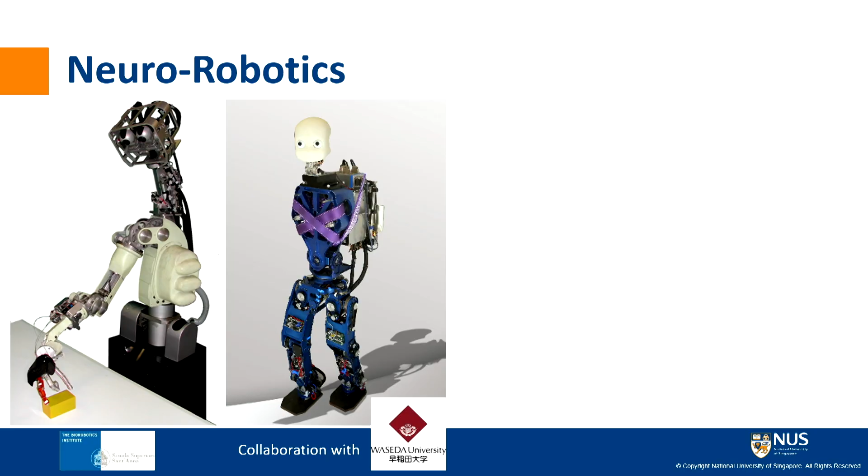And you see, I was focused on sensory motor coordination for manipulation. Then we built a platform, a biped humanoid, in collaboration with Waseda University. So I moved a little bit on locomotion, but still focused on the way the robot could learn and the way we could implement brain models on those robots.

So they were basically platforms for research. They were not aimed at any application. But despite that, I even managed to found a company, which was not really in my plan with this kind of fundamental research, but it happened at some point.

And as you see, this implementation of brain models is very much what we call the bio-inspired approach to robotics. But it's not only that, it's actually a sort of double relation between biology and robotics. Of course, the first meaning is easier for us, we are more familiar with that. So from the biological system, we observe, we derive some models, and then we build our robots. This is what we call bioinspiration, biomimetics.

There is a journal, it was mentioned, I'm editor-in-chief. It's not only for robotics, of course, it applies to many other disciplines, from materials, to many other fields of engineering. But when you do that, if you have experience in your own research, you also gain more insight on the original model. So it's a double kind of relation.

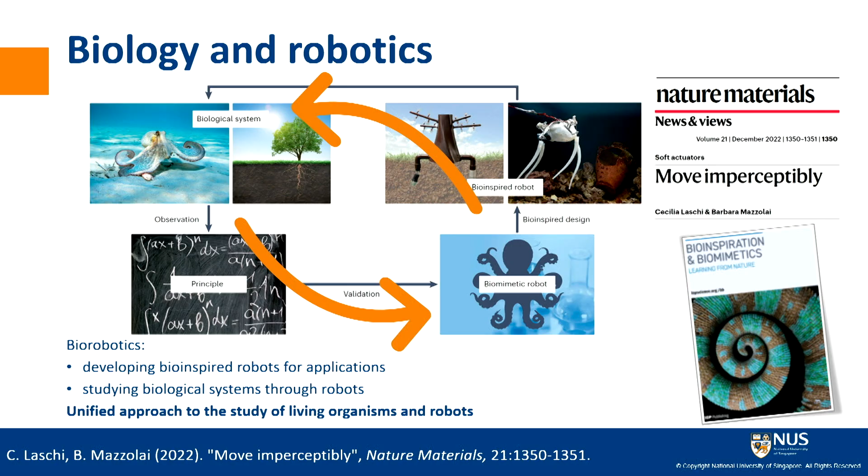Sometimes we refer to this as biorobotics when it is about robotics, but I like this definition from the first cyberneticists, actually, in the early 20th century. So it's a sort of unified approach to the study of the biological system and the machines, in our case, the robots.

And there is a very nice editorial in Science Robotics explaining this in one of the first issues of the journal, explaining the difference between the science of biorobotics, when we discover new principles and explain them, and the engineering of biorobotics, when we invent new technologies, new robots.

So going on to the first arrow, which is the most familiar to us. Okay, this is my personal view of the way we should proceed, which starts from the observation of the biological system. This is where we should get insight on the principle, how it works, the working principle. As roboticists, we can build something, but I don't call them robots. I call them sort of mock-ups, something that helps us verify the principle that we observe. And it's very much trial and error.

It's only if and when we can describe the principles in mathematical terms and abstract them that it can become engineering and robotics. So this step is very important. We have to build some models, and of course we also build prototypes here—again, prototypes, not the final robot, something that helps us verify the model at this point.

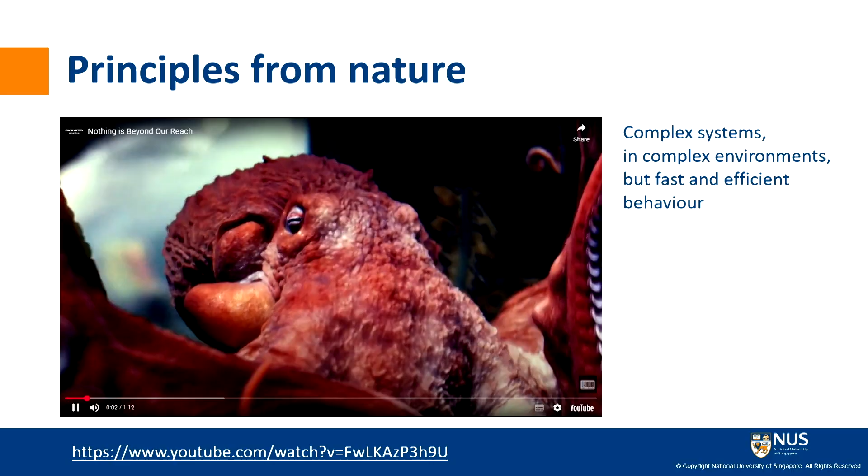So what are the principles that we can take from nature? Of course there are many, but I'm trying to distill a main message here. Let me see if I can. What we observe when we observe biological systems are systems that are very complex. We think our robots are complex, but any single biological system is way more complex than our robots.

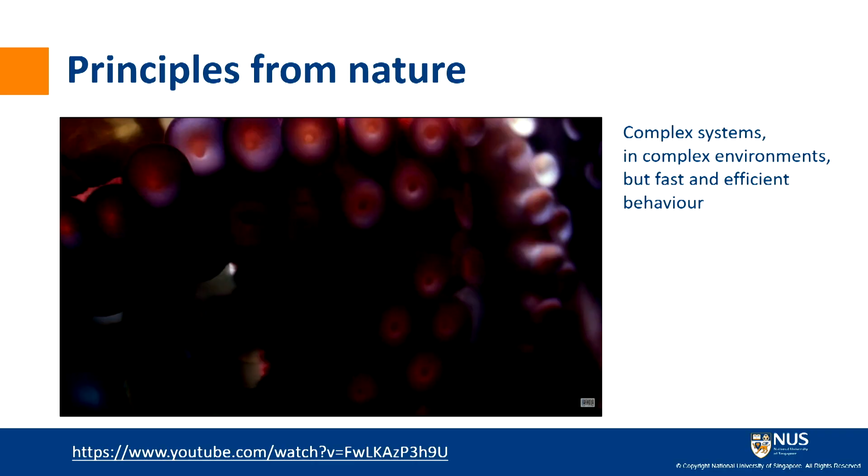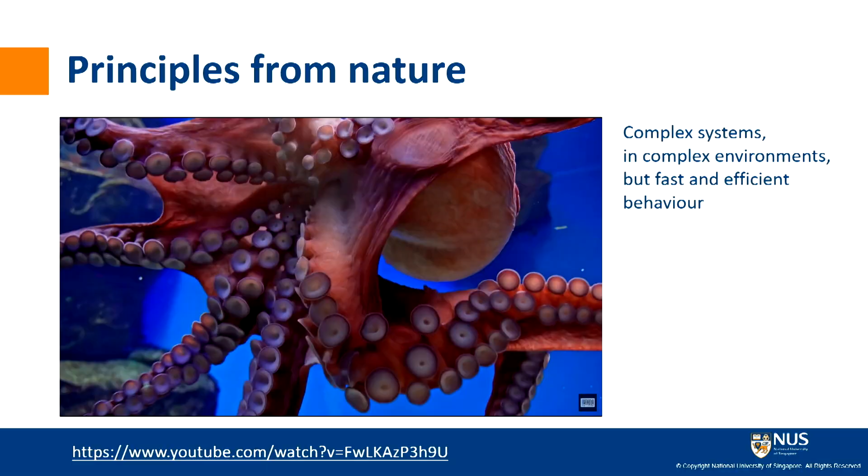In terms of sensors and actuators, receptors and muscles to control, they also live and survive and thrive in natural environments which are very complex, much more complex than the environments where we put our robots at work. But their behavior is very efficient, smooth, fast. So this is what I think we should learn from nature.

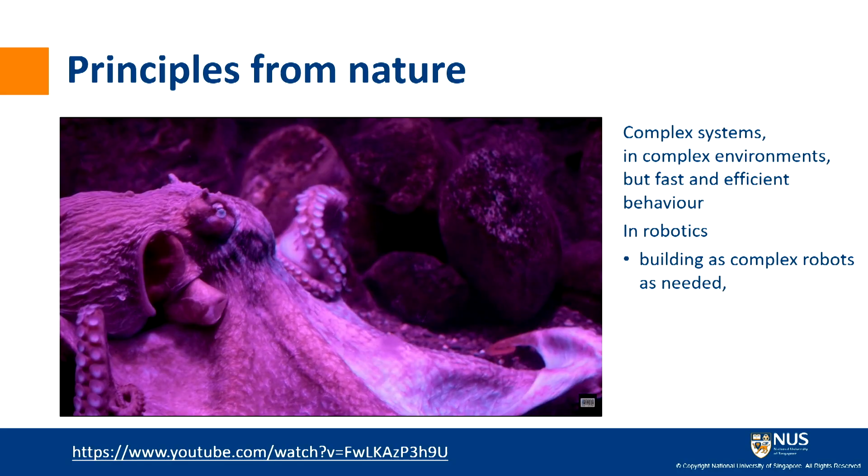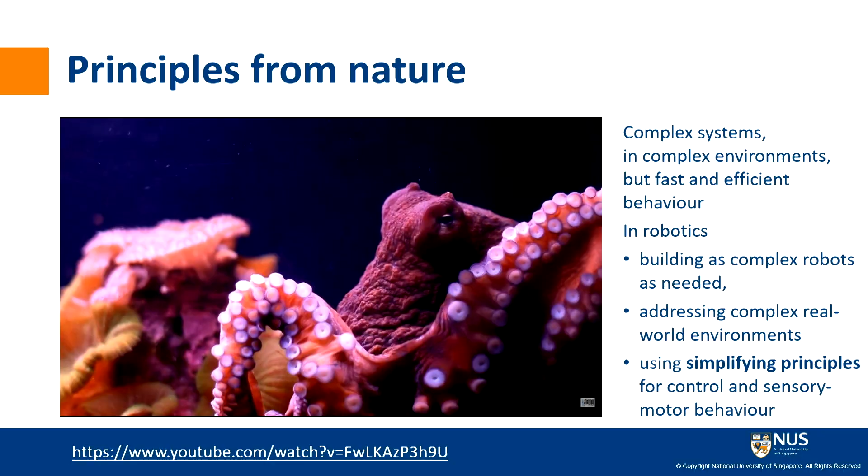In robotics, we should learn how to build robots as complex as needed. Maybe they are too simple for real environments. We should be able to let them work in real complex environments, and we should understand the simplifying principles that nature has put in place to make it possible. So complex systems, complex environments, but simple kind of behavior—the way they work is, at the end, somehow simple and fast and efficient.

In my previous life, when I was studying neuroscience, working with neuroscientists, I learned this word 'simplexity,' which is different from simplification. Simplification is what we do traditionally in robotics—we simplify the environment and put robots in structured environments, and we also simplify the system because we have a limited number of actuators and sensors. Simplexity is different: we don't want to simplify the system or the environment, but use simplifying principles to make it work in a fast and efficient way.

There are many such principles in our nervous system, in our brain, and not only in human brains. I won't go through all of them now, but I'll pick one that I find particularly interesting: the capability of brains for predictions and anticipation. We are used to sensory feedback for action in our robots, but actually this isn't always the case in brains—a lot is based on prediction, anticipation. It's a sort of open loop.

If we want to close the loop with sensory information, sometimes it's too slow to really explain sensory-motor coordination. So in robotics, we generally have sensors on one side, actuators on the other. Sensors receive something from the environment, it is processed by some form of brain controller, and an action is generated.

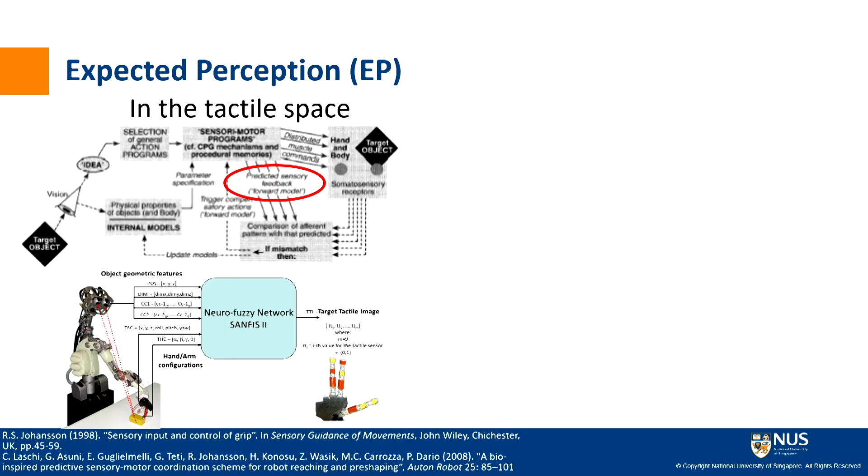We implemented this long ago in the tactile space. This is a model from Roland Johansson, a neuroscientist who explained what we do when we see an object and try to grasp it. You see that at the same time, when we generate the motor action, we generate the tactile image. This is what we implemented in the old humanoid platform that I showed.

When I did this research, almost 20 years ago, it was not very successful, because in the end you don't see a real advantage—you just save some computing time, but if you have enough computing power, you don't care too much. This is what actually happened in robotics, especially with vision. 20 years ago it was cumbersome to process an image, but today it is not.

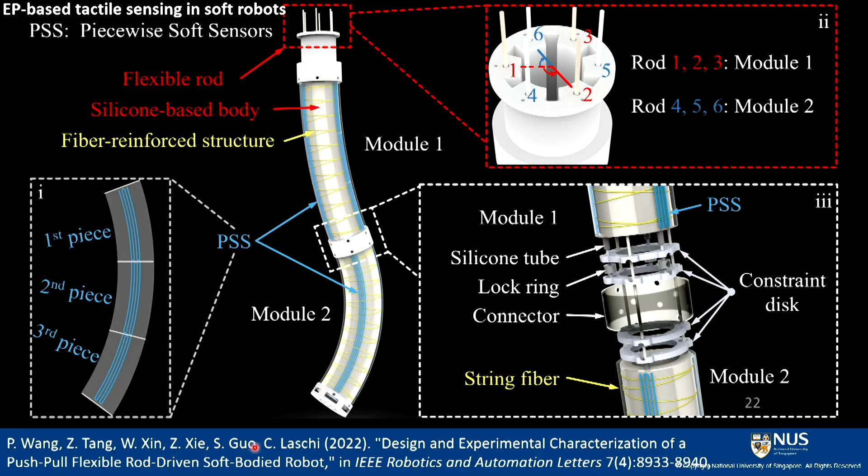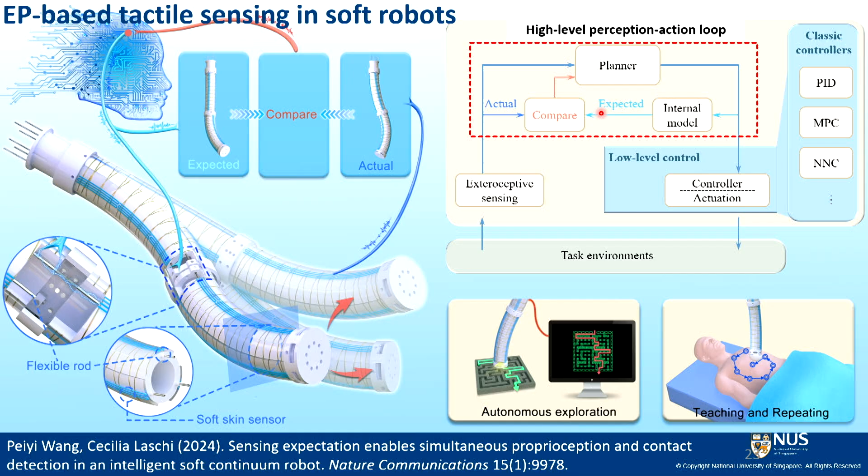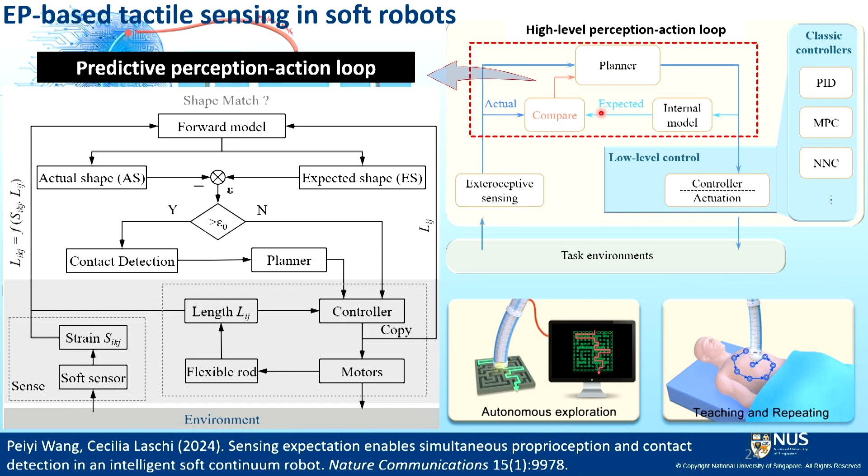This is a fundamental problem in soft robotics: how can you distinguish when the arm is deformed because I'm moving it, or because it's deformed by an external force? I consider it a fundamental problem, and the way I solved it is by using prediction. I can predict with some internal models the response, the output from the sensors, and understand if it's what I was expecting because I'm actuating and moving the arm, or if it's an external force deforming it. We gave a couple of demonstrations of it.

So we are now using here the external tactile perception to explore and then solve this maze problem.

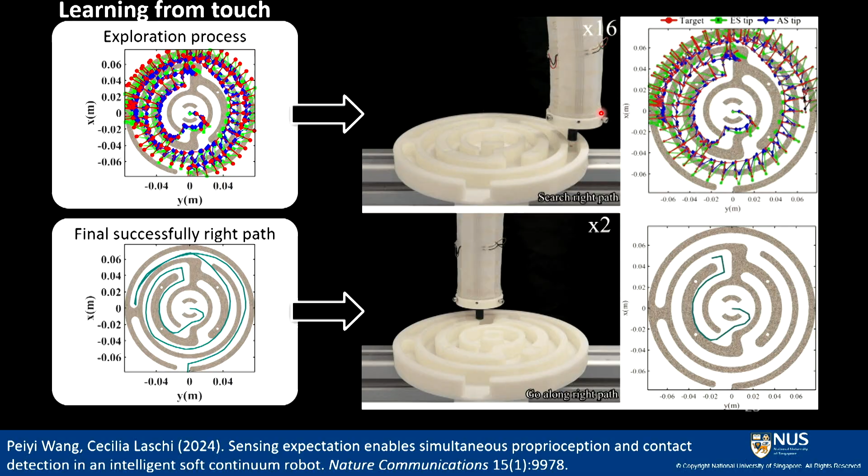Going back to my experience in neurorobotics, I was implementing these brain models, and I was pretty happy with that. But I was not happy with the body, because at some point I had to translate what was coming out from those models to talk to a body that was completely different. Those humanoids are built in a pretty traditional robotics way. There were also the years when embodied intelligence was becoming popular, saying that intelligence is not only in the brain, but the body plays a very important role. So the brain is not all.

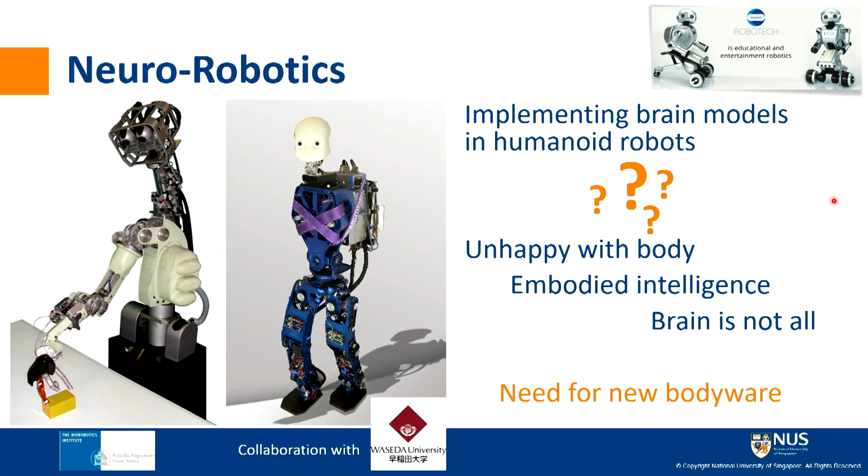So I had a lot of doubts, and I decided there was a need for a new body, where these bio-inspired brains should be more in agreement with the body. I'm sure you're familiar with embodied intelligence. It says that the body itself plays a role in intelligent behavior. Intelligent behavior means sensory-motor coordination, adaptation, and if we consider the role of the body, we can simplify the tasks of our robots very much. This resonates very much for me with the idea of complexity, the idea of simplifying principles.

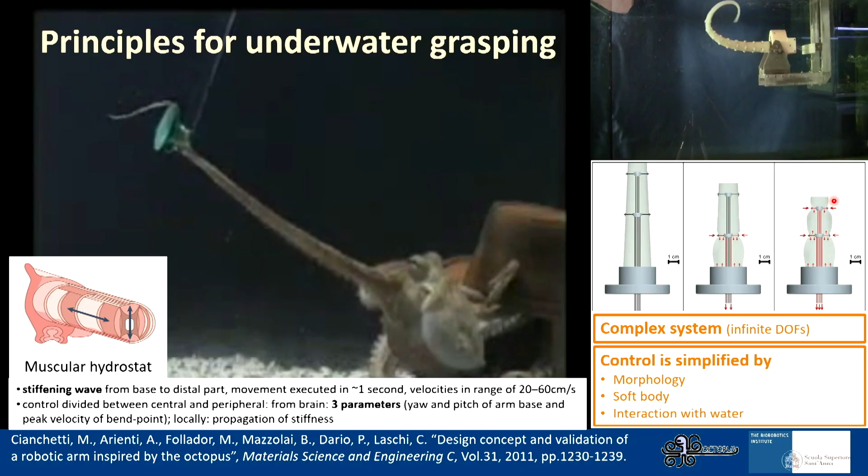This movement is based on a stiffening wave from the proximal part to the distal part. As you can imagine, there are many muscles involved. It's like controlling an infinite number of degrees of freedom, so in robotics terms it's pretty difficult. It seems the animal only uses 3 parameters from the brain to set the height, the angle of the shoulder, let's say. Then there are many neurons in the arm controlling this movement. It's a sequential activation, so it's also a simplification.

But there is also a big part which is done by the mechanical structure: the fact that buoyancy is zero, the fact that this bending is, as you see, also a way to reduce the water drag, and on the contrary, to be helped by the water drag.

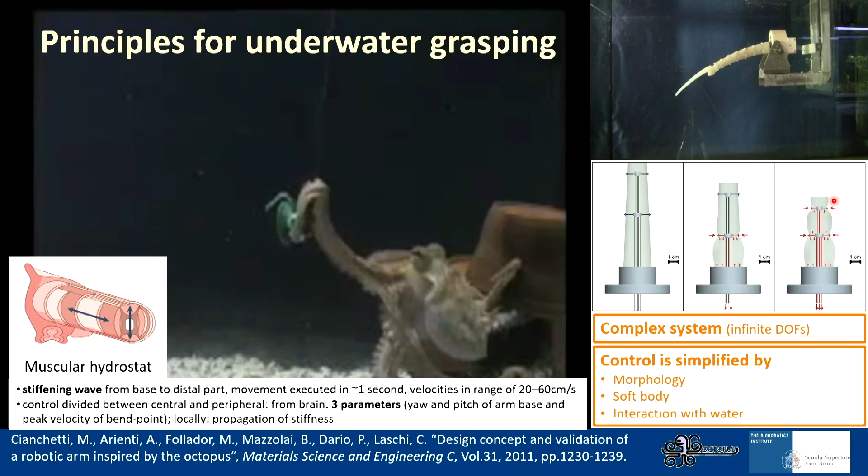We also found a lot of very interesting principles in the way this muscular structure works. It's called the muscular hydrostat, because the volume is constant during contraction. So we can have elongation and shortening when the longitudinal muscles are contracted or the transverse muscles are contracted. We have bending, of course, in any direction because of the longitudinal muscles.

We have muscles for torsions, but what is very, very interesting for robotics is that co-contractions increase the stiffness. So the octopus is a soft animal, but it's not always soft — the octopus arm can stiffen a lot. And this is exactly what we are looking for in robotics, in soft robotics.

We need to observe the principle, but also describe it mathematically. So how far are we from describing mathematically this principle of embodied intelligence that we observe in the octopus? For me, embodied intelligence is this additional arrow in any architecture you consider for your robot.

So it's this mechanical feedback from the environment. Are we ready to do this transition? And is it enough to model this arrow to model embodied intelligence?

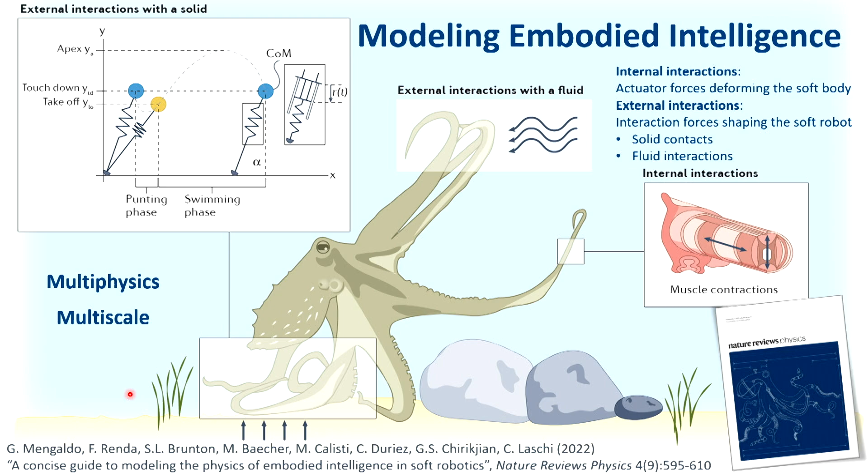We proposed a very general equation where you have a term describing the soft body and two terms: one accounting for the internal interaction, the effect of actuators, and the second accounting for external interaction forces. There are techniques for both terms—some in the realm of continuum mechanics, some based on lumped parameters or reduced order models. We just have to learn how to put them together.

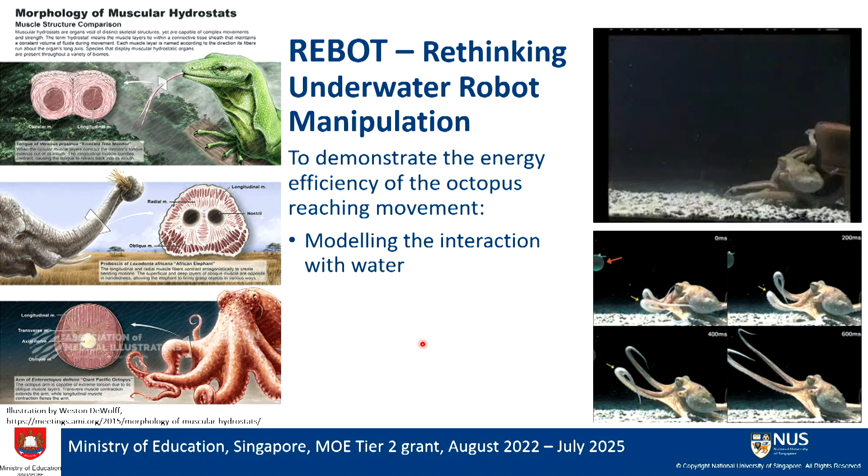I have a project exactly on this reaching movement of the octopus arm, where I want to demonstrate that it is energetically efficient because of the shape of the movement and because the water drag is used to help the movement.

I want to demonstrate this by considering not just the deformation of the octopus arm, but coupling that with the fluid dynamics of the movement in water. We also have another project, a collaboration with Italy, where we want to compare different kinds of muscular hydrostats and model their behavior.

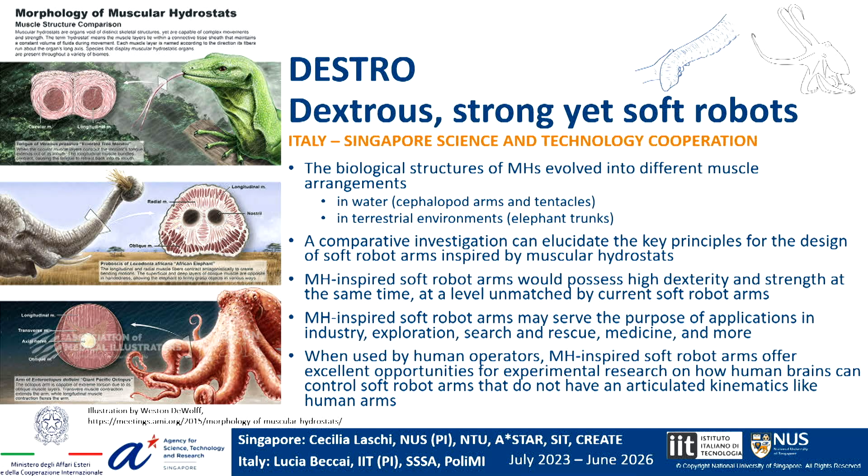In this collaboration—this is unpublished, but it's a very interesting result—with Politecnico di Milano, they developed a modeling framework for the cardiac muscle. This framework allows simulation of the activation of the muscle via motor neurons, the electrical activation, the contraction, and the fluid dynamics of the blood flow.

In our case, we replaced the cardiac muscle with the octopus muscles, arranged in the same way, longitudinally and transversally. So we can play with the patterns of activation and simulate different activation patterns. This is the best one we found, which produces a reaching movement similar to the animal's.

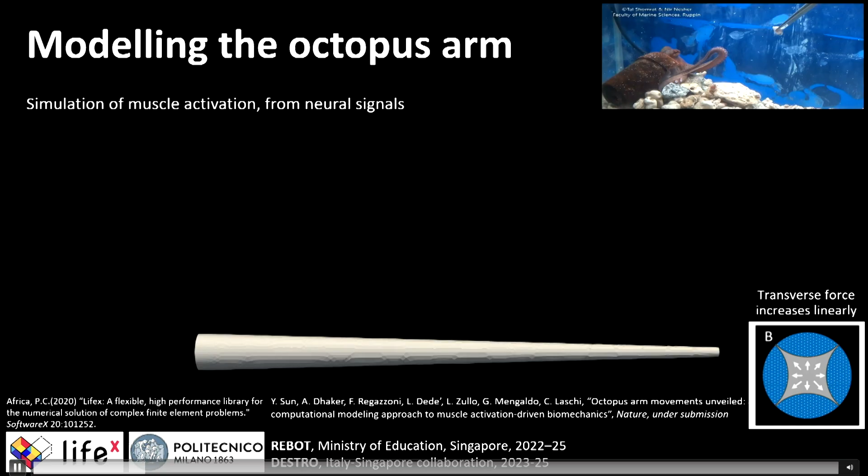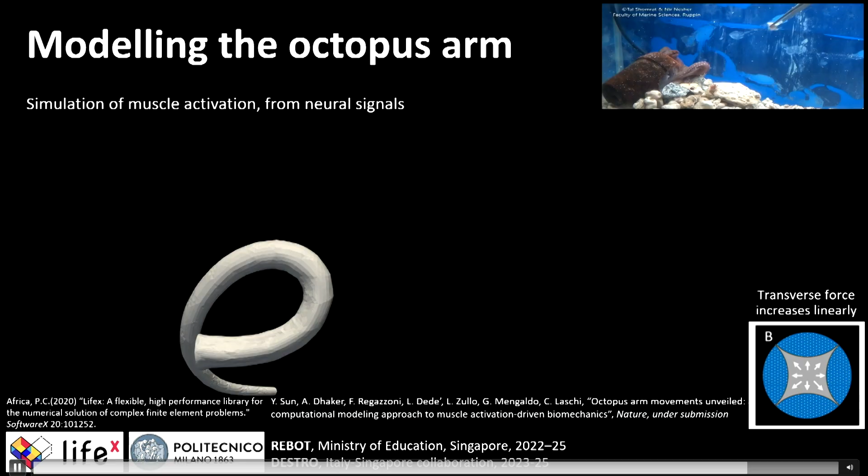We found that to have this similar movement, we need to activate the transverse muscles sequentially, as was hypothesized in biology. We also found a very nice matching with this finding in biology, regarding the invariant velocity profile of the bending point.

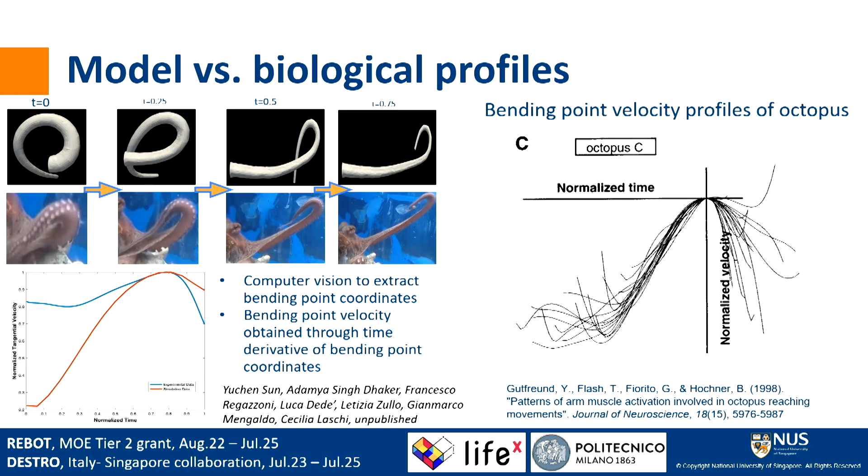We also modeled the internal interaction using the Cosserat rod approach to model not only the longitudinal muscle but the transverse muscles. This method was already used by my former group long ago, but now we could finally add the transverse muscles, demonstrating their important role in obtaining this stiffening wave.

We use a similar approach for the arm I presented before, so we can have a very nice forward model from the rod length. We can actually generate the shape, the final shape, and also the sensor state.

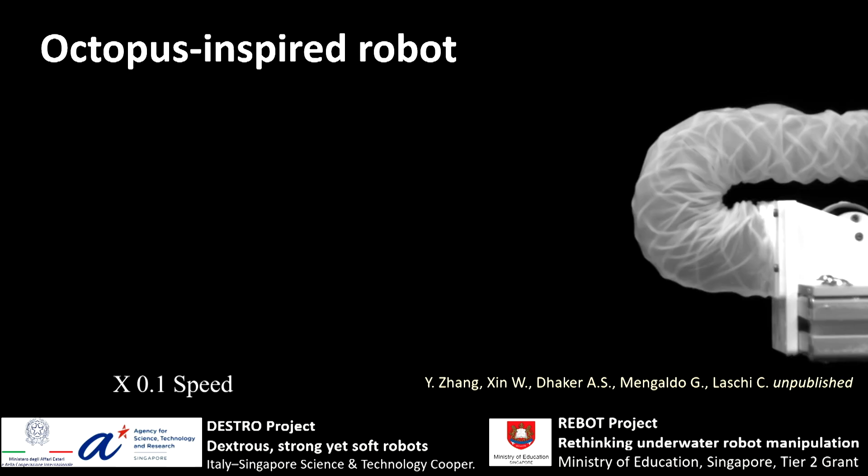Of course, we are building—since this is our ultimate goal—octopus-like arms. I cannot show the internal structure of this one because it is under patenting, but you can see it generates exactly the bending, the bending wave from the proximal part to the distal part.

What you don't see in the video is that the proximal part, from the base to the bending point, is stiffened, while the rest, from the bending point to the tip, is completely passive—exactly what we observed in the animal.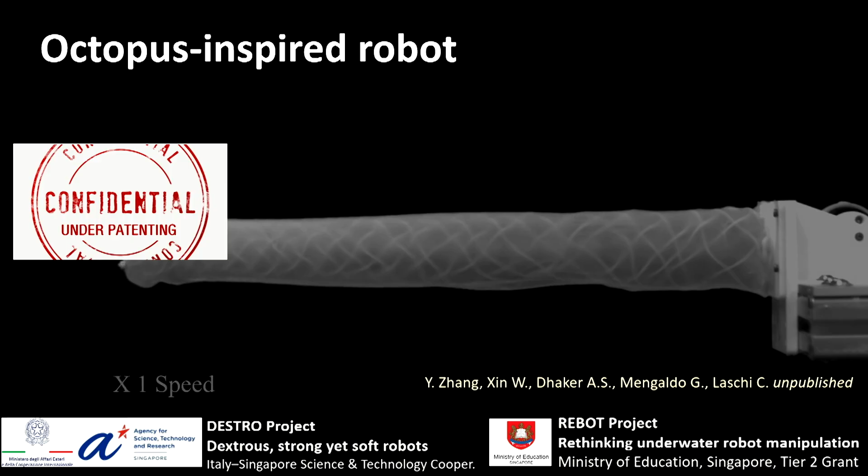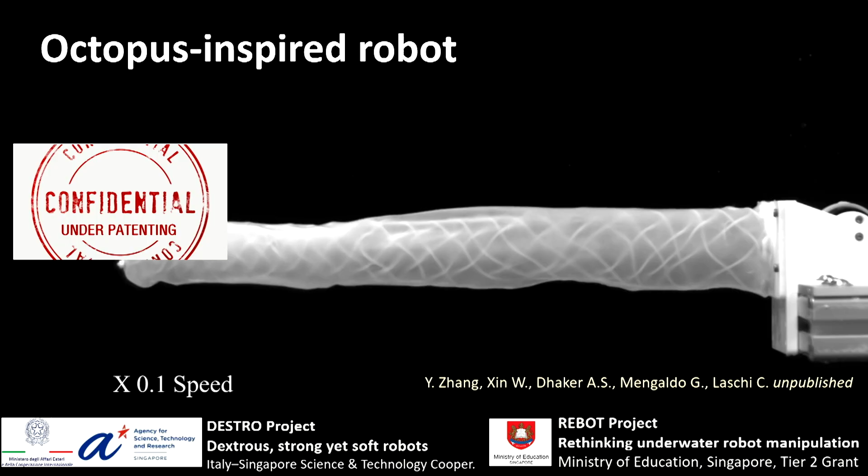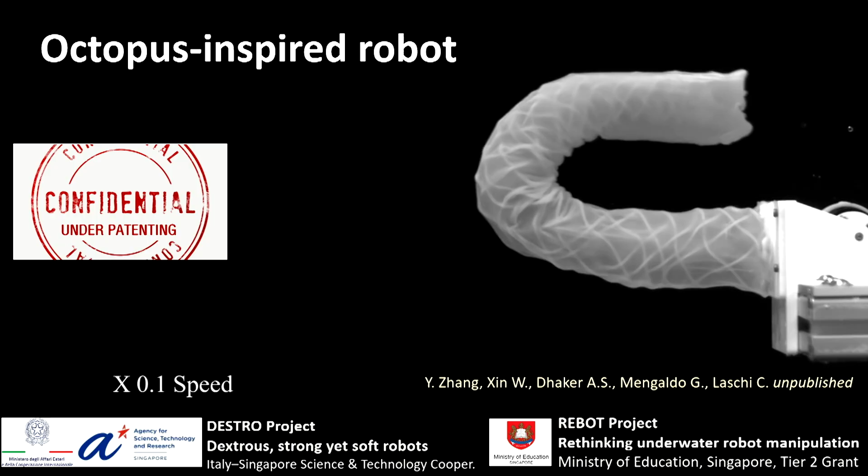Again, I want to demonstrate the energetic efficiency of this movement in water. For the moment, we found it is also very fast and very efficient. We are testing it on some underwater robots, and we are going to test it in the deep sea, 2,000 meters deep. For now, we went in the pressure chamber down to 1,000 meters.

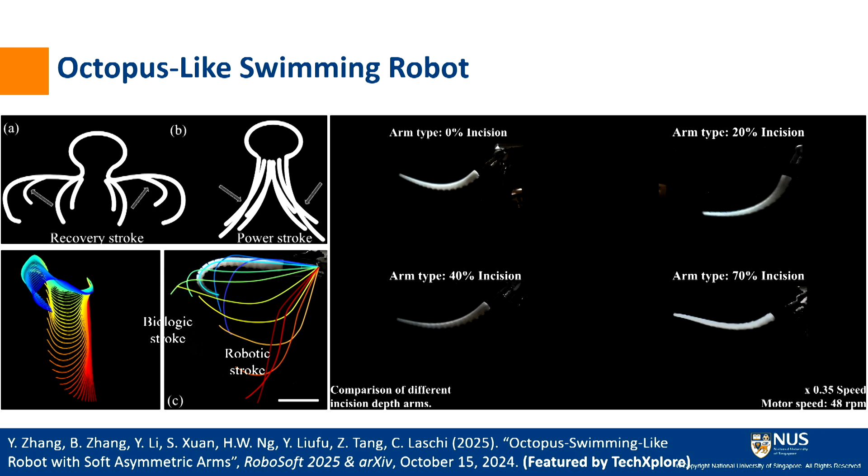Still playing with the stiffness—this is a student project actually—where he tried to implement this swimming-like, octopus-like movement, where we want an anisotropic stiffness because we want the arm to be stiff during the stroke but then very, very soft during the recovery. He tested different ways to build this robot. Let me go a bit faster with the video.

Okay, no need to go faster. This is just the way it swims. Since the arms are moved at the same time, it's basically one actuator.

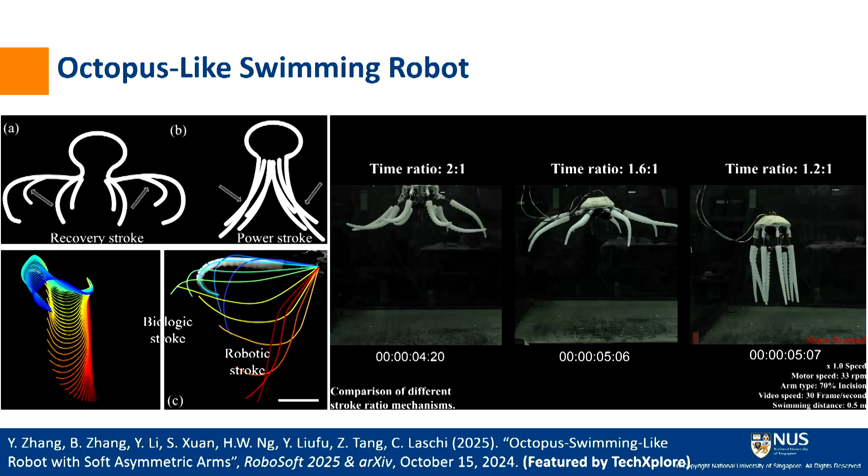Then we have a prototype that can steer, but with just two actuators, with an asymmetric activation of the arms, and that was featured in a technical journal.

We are also testing another hypothesis that we found in biology. It seems that octopus arms, elephant trunks, and many other appendages like tails, and even maybe the human arm - but I will ask Hermano for that - seem to follow a spiraling movement, which is a logarithmic spiraling.

And so we did a little bit of a mathematical model. We played with some of the basic parameters, and we also built a prototype, which is pretty simple.

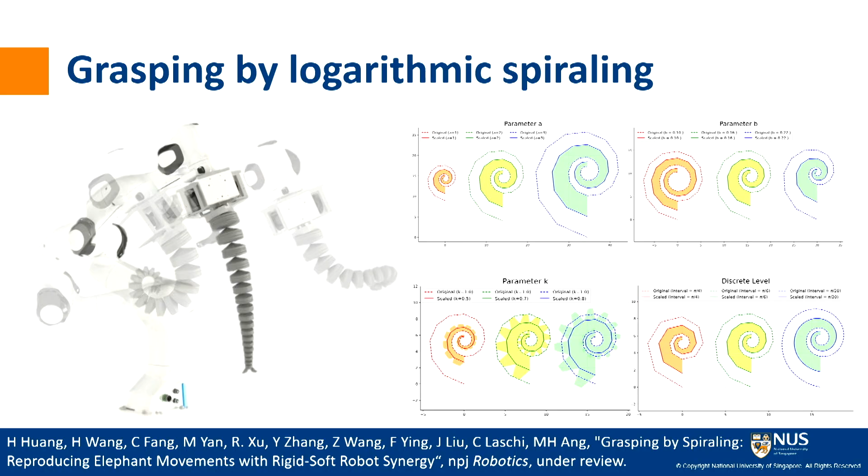I go back to the prototype that you see in this picture. So you see it is actuated by 3 tendons - 3 to have the omnidirectional movement. So only 3 tendons, so we don't have much in terms of actuation. But since the geometry, the morphology, is designed based on this logarithmic spiraling, we have very nice movements.

And we actually demonstrated that we can reproduce some of the motion primitives of the elephant trunk. We have data from biology because there were experiments done on basic movements of the elephant trunk when grasping different kinds of objects, so we used that data to do this comparison.

And even if the robot is completely different in terms of actuation, in terms of working principle, the final shape of the movements is very, very similar because of this logarithmic spiraling.

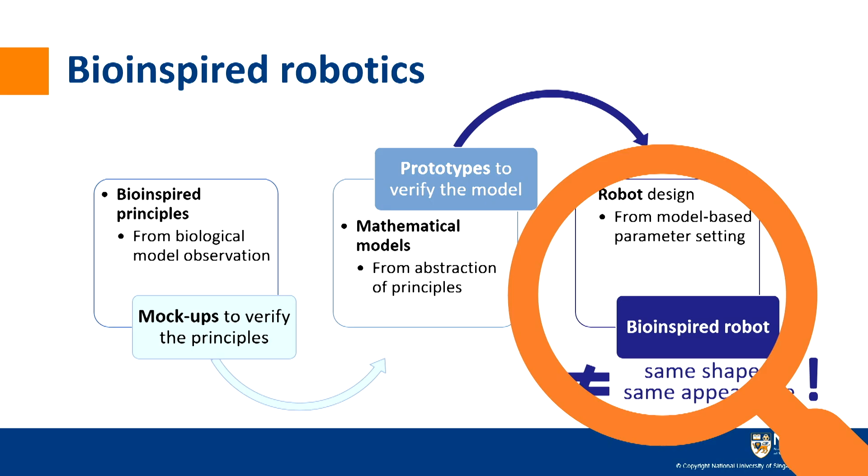So the last step of our, let's say, bio-inspired robotics method is the application, the final robot. So what kind of applications for all those robots? Of course, the first idea is to go back to nature.

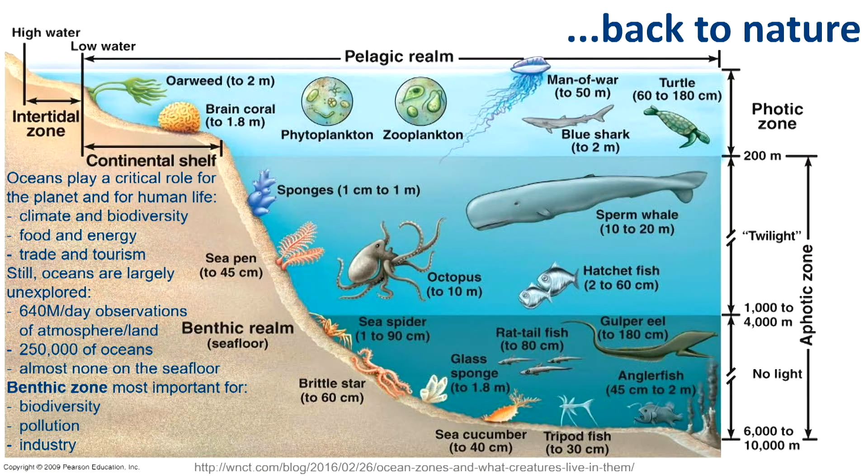Actually, we know that robots are so helpful on the water, but they basically operate in the water column. They don't go on the sea bottom generally. And the sea bottom is very, very interesting because it's where, for example, human activities happen. It's where pollution tends to accumulate. It's home to 98% of marine species.

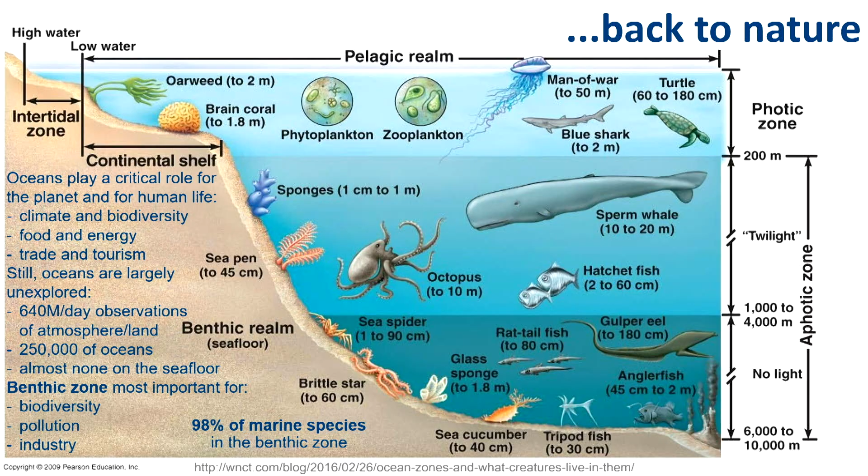And from the octopus, of course, we learned a lot about how to operate on the sea bottom. This is a benthic animal - they live on the sea floor, and they have very nice strategies for locomotion, for walking underwater, for swimming. I'm not going into the details, but there are a lot of simplifying principles in those movements that we can reproduce with robots with very few actuators and very simple control.

So we especially focused on the walking underwater. Walking underwater with legs is not a good idea generally. You probably experience when you walk in the water, you have a lot of water drag on your legs, because they are rigid, because we have a skeleton.

But we found a very smart way of doing that in the octopus, and we describe it with a reduced model here called the U-SLIP. And we found that it describes also the walking of crabs, and especially the running of crabs underwater.

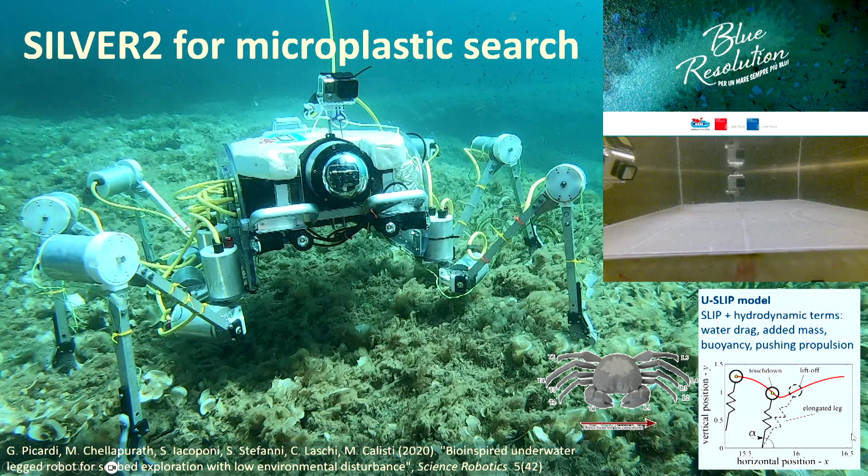So the idea is very simple: we reverse the angle of attack and we push from the back. So the octopus basically pushes from the back, and having completely soft arms, it can shorten and elongate, reducing completely the water drag. The crab does something similar, and based on this model, we could actually design and build this robot that can walk underwater.

The compliance here is in the joints, in the motors, in the joints. The control is basically zero. There is no leg coordination. There is nothing here in terms of control.

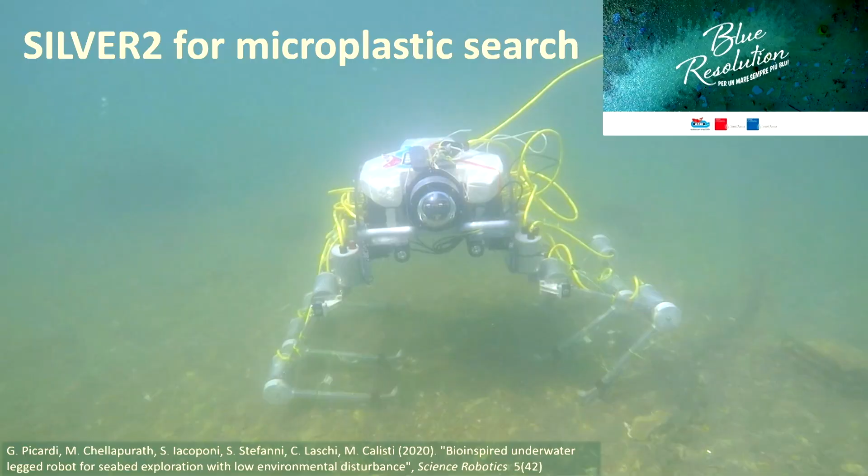But thanks to the mechanics, let's say, this compliance, we also have self-stabilizing gaits. And the robot can keep station without using any energy, without using the motors, and can negotiate obstacles also without any computing - it's just mechanical.

So we can envisage a lot of marine applications for soft robots. They can walk on the sea bottom, but we can use materials that are biodegradable, materials that are self-healing. We can use all the adaptation capabilities of soft robots, and we can really come up with very complex scenarios for marine applications.

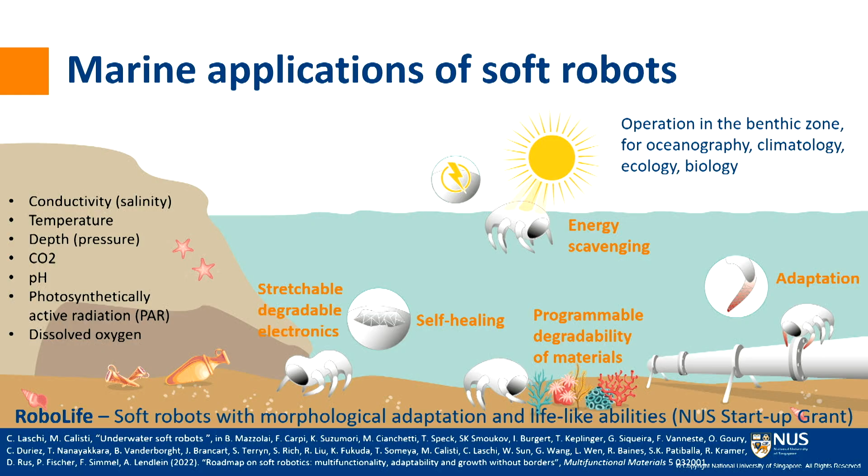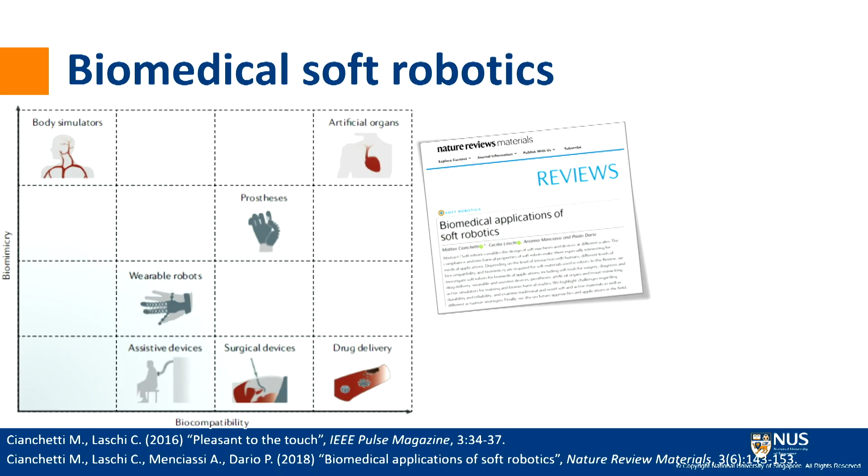In the biomedical field, there are also many applications for soft robots, from artificial organs that can be built with the same technologies that we develop for soft robots, to assistive devices, prostheses, or exoskeletons, soft exoskeletons, or even surgical devices like endoscopes that can navigate safely inside the human body.

Assistive robotics is one of those fields. Of course, if you have to assist the patient with a physical interaction, soft robotics technologies are especially well suited for that, and this is where I'm focusing my research now.

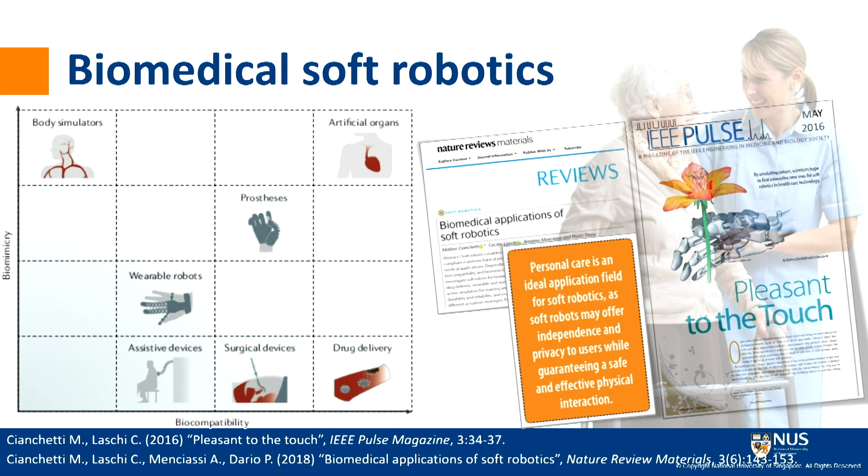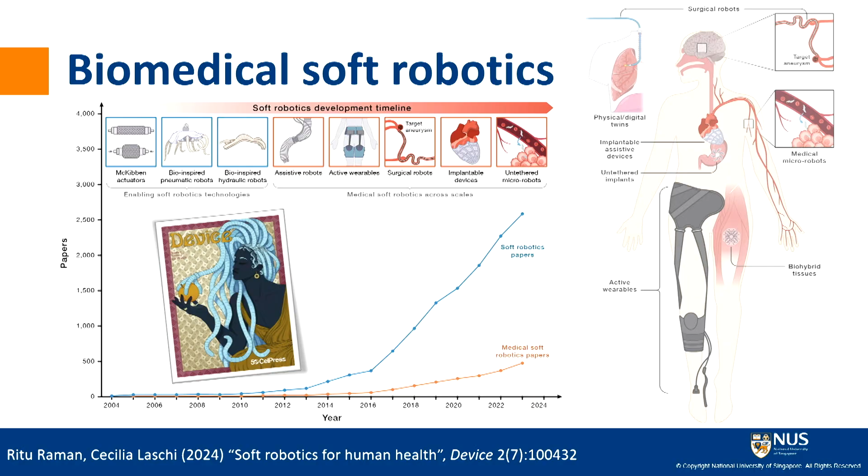The field is growing. We made this analysis with Ritu Raman recently and published this paper. There's big growth, not only in terms of publications but also in terms of technology. There was an evolution of the technologies, and we tried to give an outlook to the future where we think many of these concepts can be stressed further, and maybe we can reach physical digital twins of the human body using soft robotics technologies.

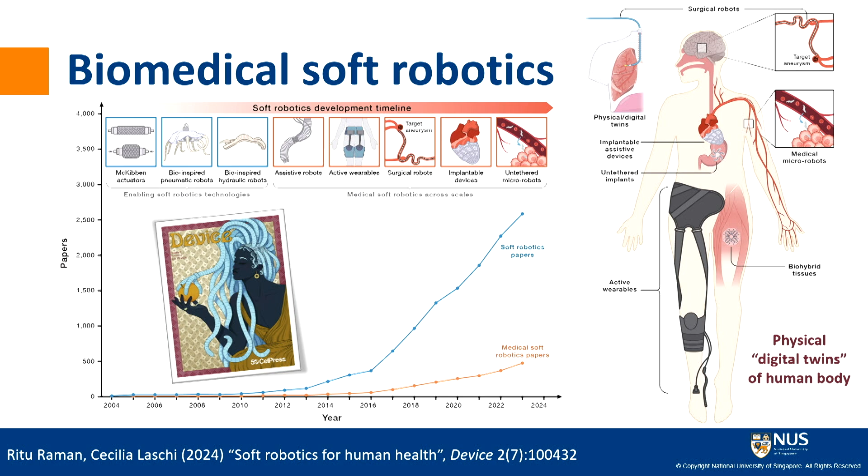I'm focusing a little bit on assistive robotics in one of my projects in Singapore, this CARTIN, a Center for Advanced Robotics. But when you do that, we are no more on the science side, we are on the application side, so you have to consider the users very much, especially in cases like this where the users are common people. So we use methods from industrial design, user-centric design.

The idea is that you have studies of the users and descriptions of the users and their needs at the very beginning, before designing the robot. This is supposed to increase the acceptability, the final acceptability of the robots. In our case, the users are not only the elderly that we want to assist, but also their caregivers, the clinical staff, and ultimately we hope to have a wider adoption of robots for elder care.

We did this study in a hospital in Singapore, where there's a very interesting geriatric day hospital where the elderly go during the day. So it's not a hospital ward with beds - they go after hospitalization to relearn some daily tasks. This is perfect for us because we wanted to address daily tasks, so we had a lot of observations of the way they do the tasks.

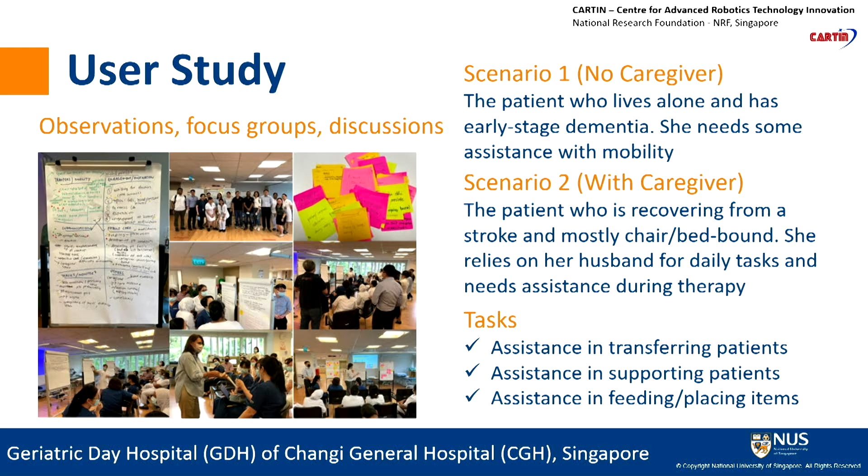In terms of tasks, we were surprised because we were thinking of feeding, maybe dressing up, but it was clear that the very big priority is the transfers, the transitions - from bed to sitting, from sitting to standing, from chair to wheelchair. These kinds of transitions are where they have the greatest need for help from robots, and of course these are also the most difficult tasks for soft robots.

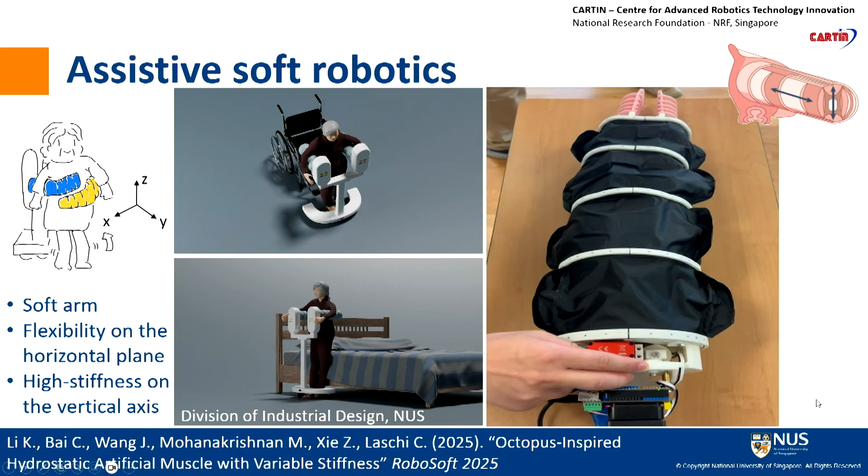So in terms of technologies, our problem was to have something that is pretty stiff on the vertical axis, but very soft and movable on the other, the horizontal plane. We collaborated with the Division of Industrial Design of our university, and they came up with this nice rendering, and we've already made a couple of prototypes. Again, I cannot show the internal structure because we are patenting it.

I'll just spoil that it is based on what we learned from the muscular hydrostat of the octopus, in terms of how to change the stiffness and increase the stiffness of our arm when it has to carry a high payload like the weight of a person.

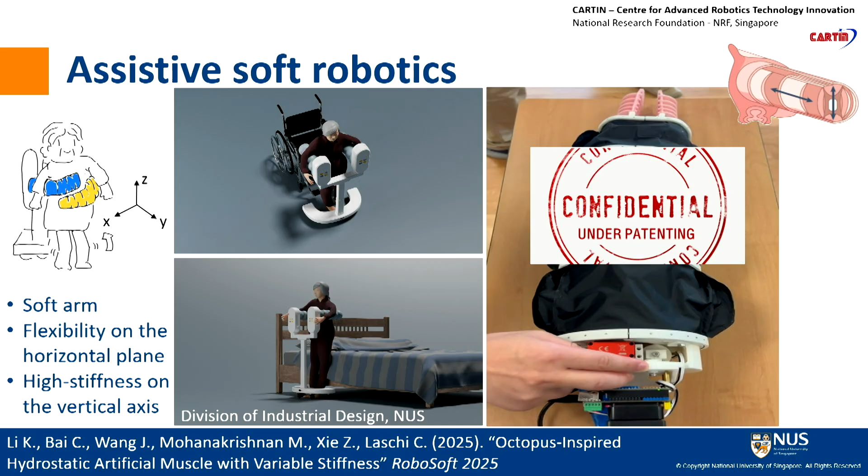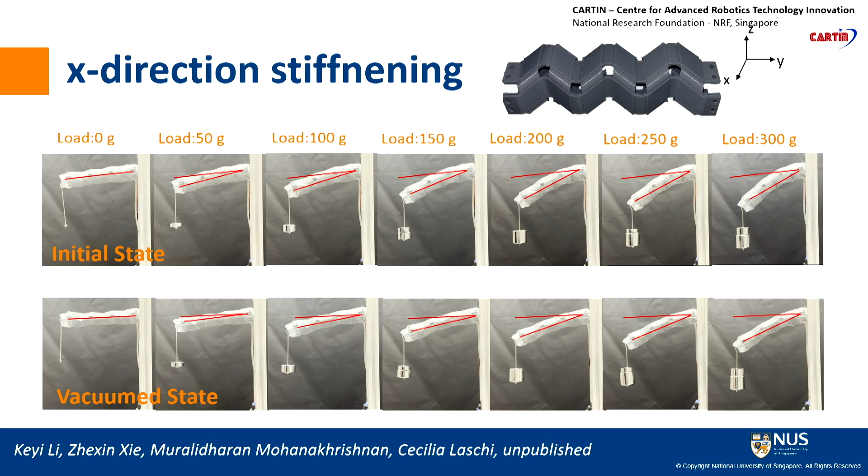We tested other solutions, some based on these origami structures and layer jamming - this is also unpublished, and you're probably familiar with the jamming transition. In this case it's layer jamming, so layers of material inside a membrane, then you remove air and the whole structure becomes very stiff. We could actually measure the stiffness - we're especially interested in the stiffness along the z-axis, which is where we want to carry the weight.

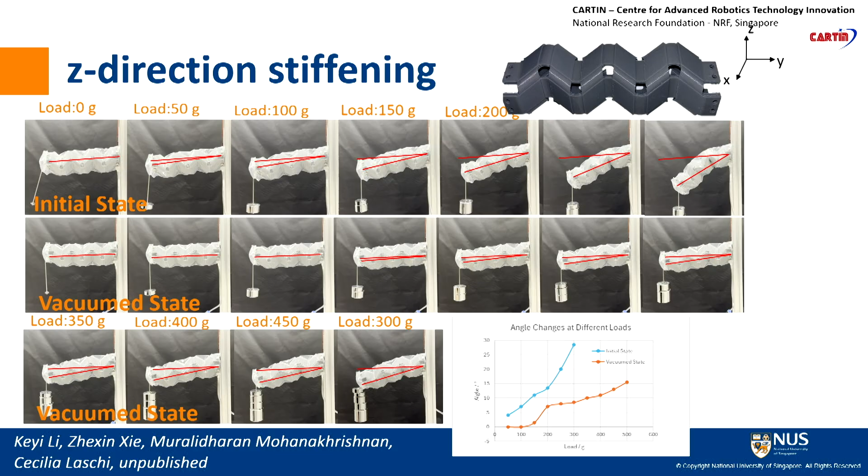A similar structure based on origami deformations we are using in another project, in collaboration with MIT in Singapore, called SMART. I cannot talk too much about the use case we're addressing here because it's still confidential, and I'm not giving many details of the arm either, but I can show a couple of videos where you see just the performance of the arm, which is completely retractable.

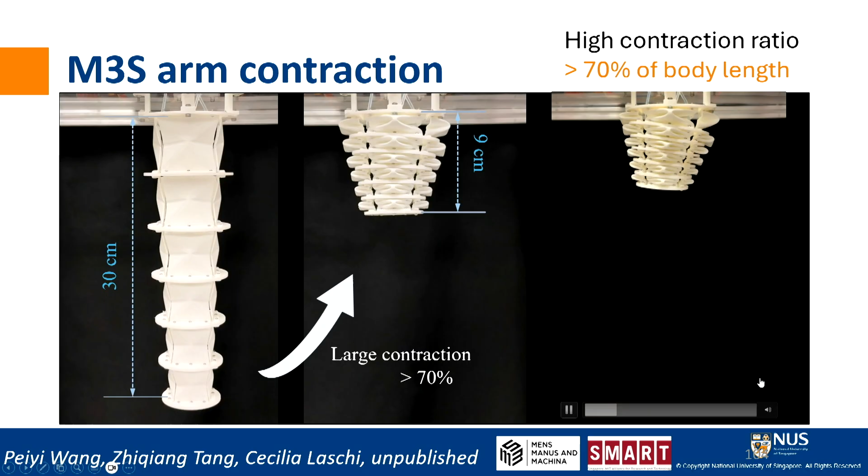You see it can fold completely, and it can also bend widely in all directions.

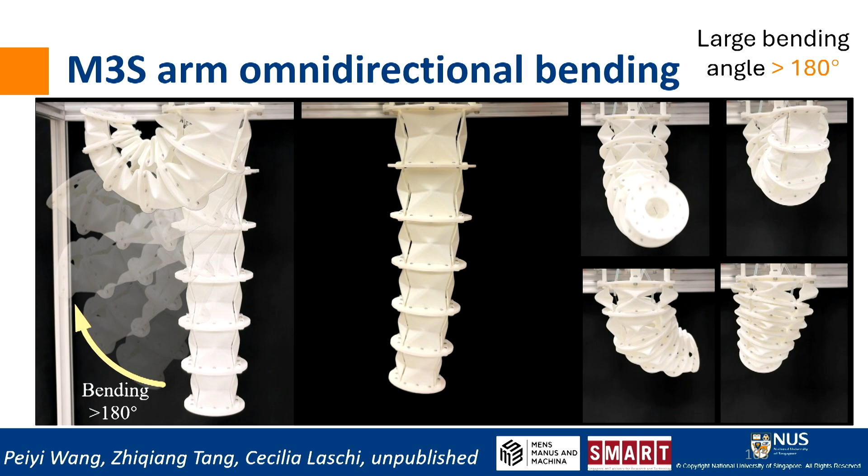So I can bend basically even more than 180 degrees. When we develop this kind of arms for some applications, assistive or others, we want to control them. Even if we develop some robots for embodied intelligence where we don't want to control them, in the end we want to control them, and using the same approach as traditional robots is a bit difficult. At least for me, we have to consider more transformations than we're used to, generally between task space and joint space. With soft robots, the concept of joint is a bit blurred.

So we have some actuators somewhere. They produce a deformation, and this deformation will bring the end effector somewhere else, but it's a bit more difficult to really specify those transformations for sure.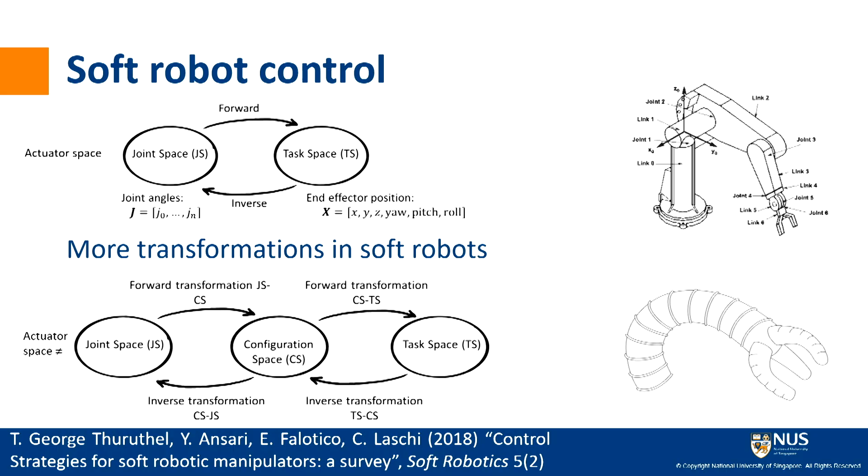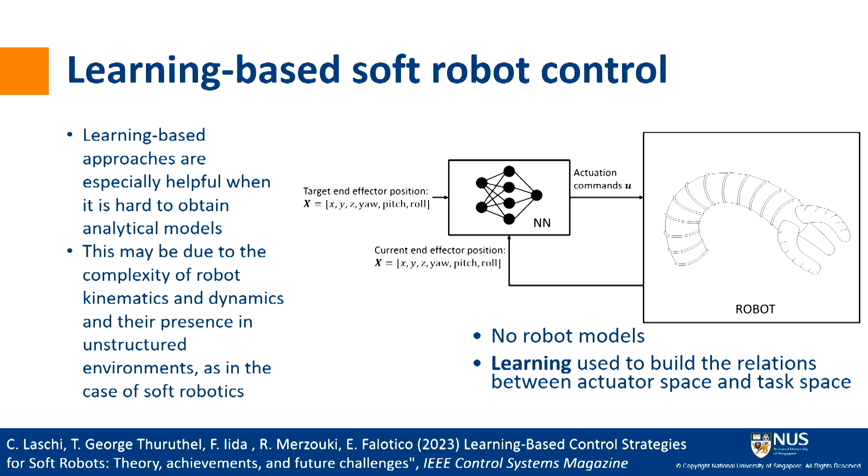There are some more techniques to model the internal deformations or the effect of actuators. But in soft robotics, it also makes a lot of sense to use learning to replace the model-based controller, where we give the task, the desired position for the end effector, and the neural network can generate the commands for the actuators. So we don't use any robot model. This is not because the models are impossible to have, but because they're generally complex and not accurate - not because the math is not accurate, but because the soft robots themselves are not accurate. So there is always a bit of mismatch between the model and the robot itself.

We demonstrated this a few years ago, comparing a model-based approach with a very simple neural network on the same prototype, where we also simulated the inaccuracy of the model. What you see, which is pretty expected, is that with the model-based approach, the error grows with the inaccuracy of the model we are simulating. The neural network is less accurate - you see the error here initially when the model is very good, the neural network has a higher error - but it stays the same irrespective of the inaccuracy of the model, because it's not using a model, but learning on the physical robot arm.

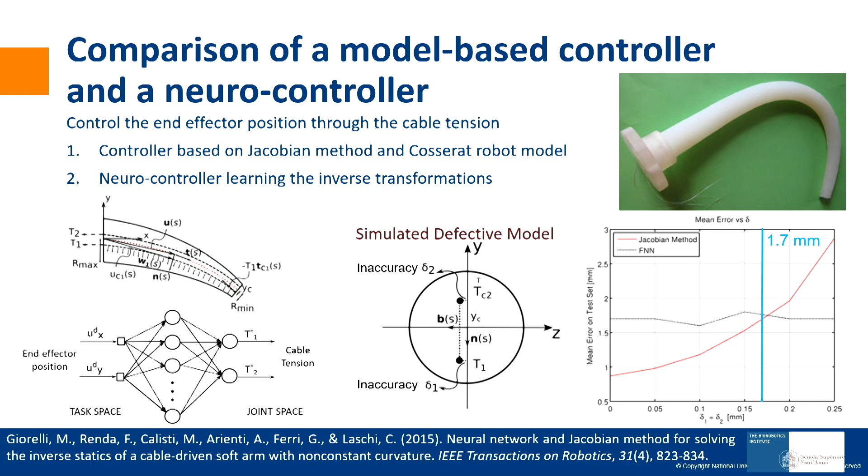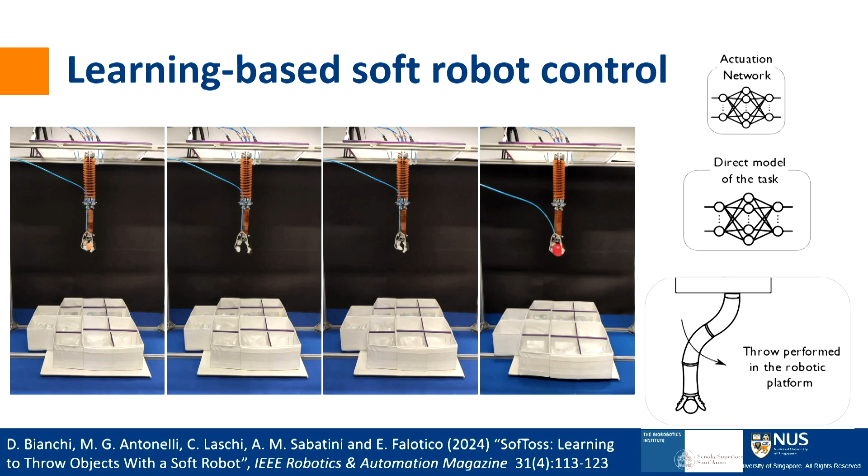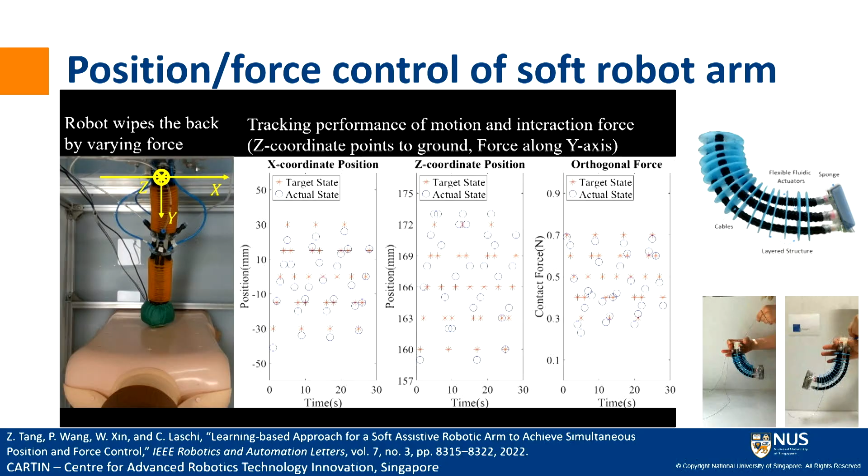So with these learning approaches, we can also control some dynamic tasks like this very nice throwing. We can control the stiffness when the robot changes stiffness. In this robot, we have two different kinds of actuation, and they are antagonistic: pneumatic chambers that tend to elongate and cables, tendons that tend to shorten. So they have an antagonistic effect, and we can tune the stiffness to some extent.

And with some learning-based control, we can control not just the trajectory but also the force that the end effector applies. We are testing some imitation learning in soft robot control, for example with demonstration by a person. The experimenter produces some letters, like the letter B, and then the robot can learn from this demonstration. Or we can use tele-demonstration, or try to learn by imitation of a biological model like the elephant trunk I mentioned before, or even from climbing plants - this was a project we had with Barbara.

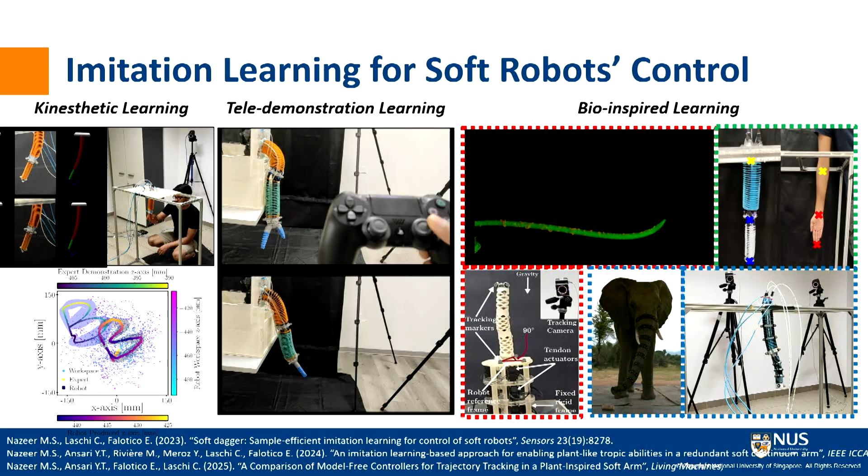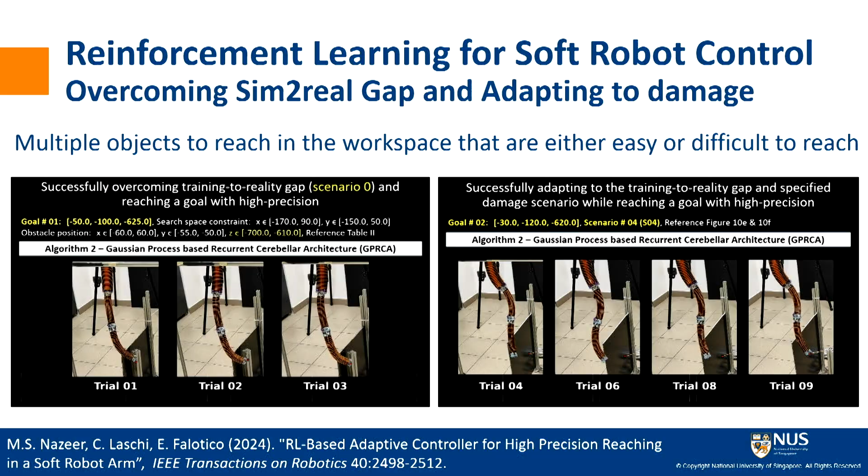And we are also testing reinforcement learning. We had very nice results in reducing the sim-to-real gap and in adapting to damages. We have some unpublished results still on using reinforcement learning to control not just the position of the end effector, but also the position of other points along the arm, as well as handling external disturbances - external deformations - where the robot can still try to keep the end effector in the target position.

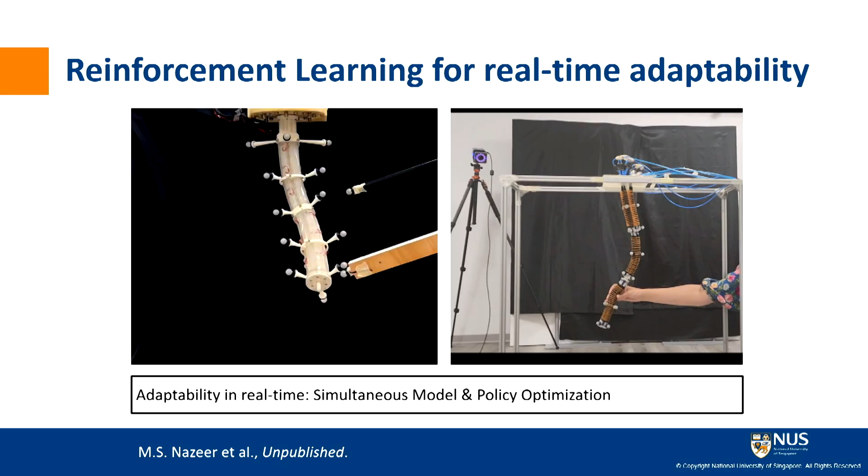So, let's say the field of controlling soft robots is growing. There are more publications, and the use of learning in those control systems is also growing. We published recently, contributing to a special issue on the control of soft robots.

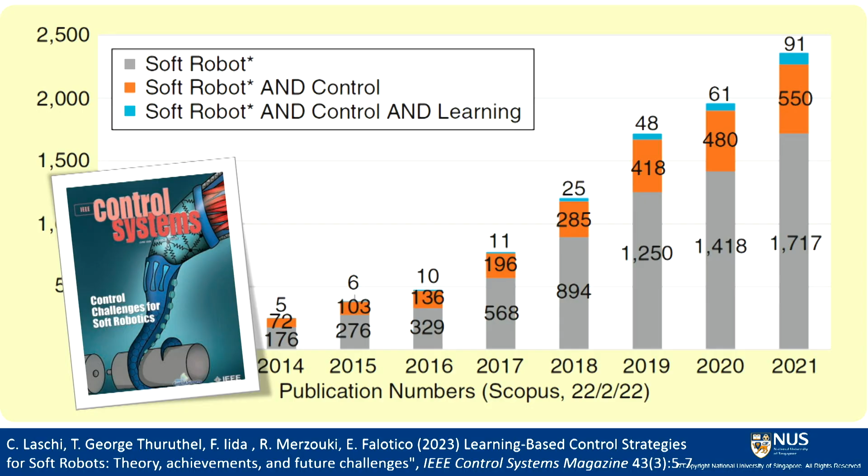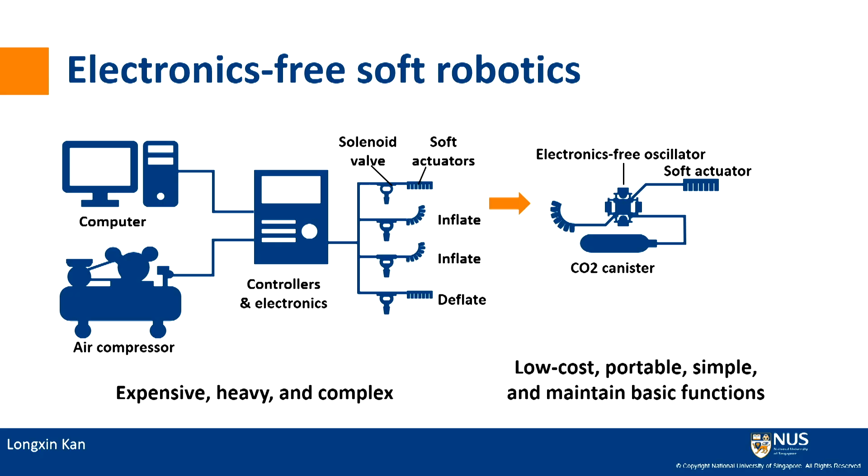Because we also like robots where we don't control anything at all. We don't have any electronics, we don't have any computing - so completely mechanical kind of robots. This is the work of one of my PhD students. It's based on a bi-stable valve, so we have just two states. What you see is a small tube that can be kinked here and here, or here and here, so you can switch mechanically between these two states. And if you have a constant input of air pressure and an actuator, by switching between the two states, you either actuate or not your pneumatic actuator.

So a very nice demonstration is this gripper, where there is a mechanical switch, if you want a mechanical sensor. When there is a contact, we switch to the other state, and with this constant air pressure input, you get a bending of the finger and the grasping. We can make the system a bit more complex with small pneumatic actuators that do this mechanical switching, and this way we can generate rhythmic movements.

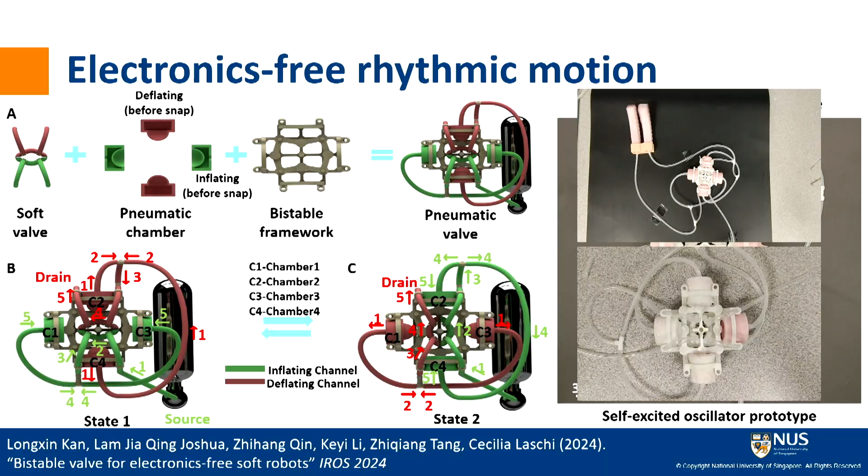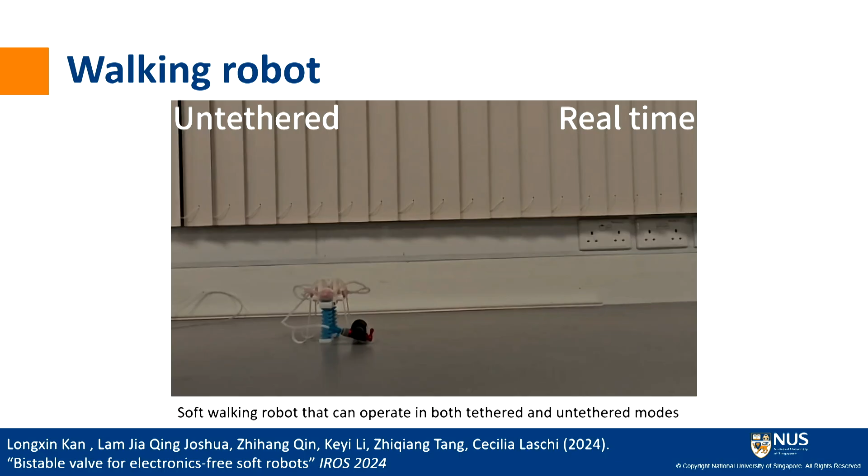With rhythmic movements, you can control rhythmic patterns of locomotion, for example for two legs, for swimming, or for flying. This is an example of simple walking robots. The input is untethered, so there's a small air bottle the robot carries with it. You just open the bottle, and that's done. You don't have to control anything else.

For me this is really interesting, because you can think of using completely biodegradable materials for this robot. There's no electronics, so you can create a robot that is completely biodegradable. For me it's one of the steps we should take for greening robotics. It's time to green robotics. We cannot let robotics become something like other digital industries.

For me the very first step is reducing computation. I understand we have the computing power to do all the processes we want, but we can even take some of the elegant lessons from nature and be efficient and reduce compute. It's a very first step to reduce the pollution that our robots can create.

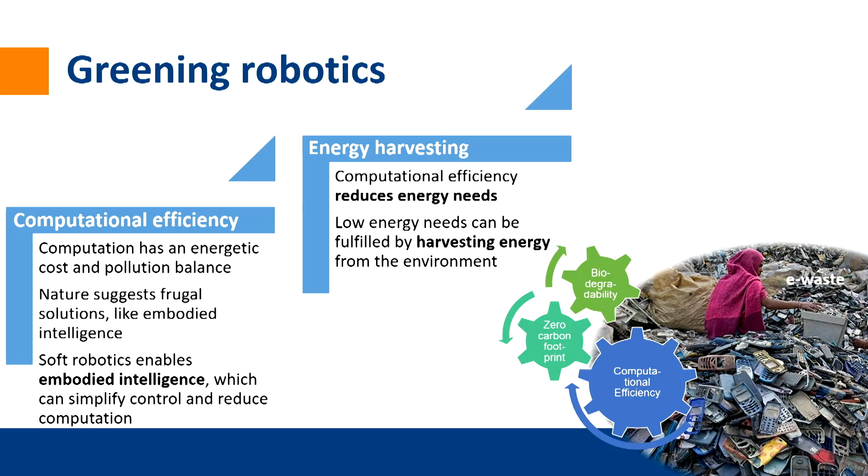With reduced energy needs, we can try some energy scavenging, energy harvesting techniques. And with soft robotics, we can also explore biodegradable materials. All this can contribute to a vision for future bio-inspired robots that we published a few years ago with Barbara.

It's a simple concept: we should think of robots with life cycles like living beings, which means they are generated at some point, they can grow, they can learn, they can adapt to their tasks, they should be autonomous in self-healing and in finding their energy, and they should have an end of life where they integrate back into the environment without adding e-waste.

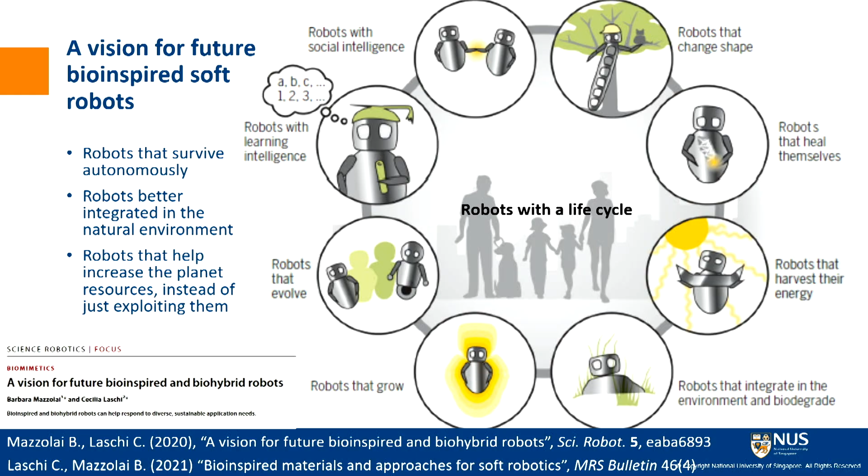The field of soft robotics is an excellent place to do that, because it's interdisciplinary—we can address all those different aspects. It's a growing field in terms of number of publications. This plot is a year old but the shape is impressive. It's not just the number of publications, but the quality, the journals where soft robotics publications appear. It's one of the top topics in Science Robotics and in the IEEE Robotics and Automation Letters—about 10% of all IEEE publications in robotics are about soft robotics.

The community is very lively. It started with RoboSoft, which was a European grant, but it soon became a conference, RoboSoft, which already has 500 participants and is constantly growing. In the Robotics and Automation Society there's also a technical committee. Those of you interested in soft robotics, please join these activities.

So I finish with a small announcement. If you are also involved in teaching soft robotics, stay tuned, because there is a new textbook coming out from MIT Press. It will be available in August.

I just conclude by thanking and acknowledging all the funding agencies, but especially thanking my group in Singapore—students, PhD students, postdocs who did this wonderful work. You see how nice the group is.